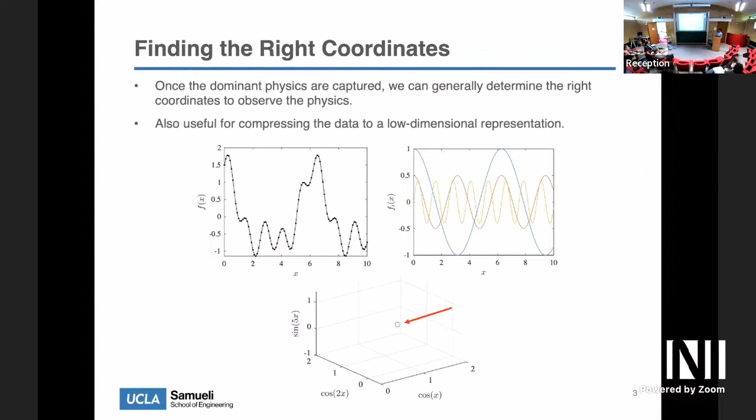Okay. Now, what have we been doing? We have favorite compression techniques. In the past, there's been a lot of efforts that looked into modal analysis techniques, including POD and DMD. Let's see if this works. Here we go. If you have a collection of fluid flows, we can go through the routine of POD type analysis, decompose it into mean and modes. If you have dominant modes, you can keep up to certain modes and truncate, and hopefully you'll get a reconstruction that looks fairly good for your need. If you need more, you can, of course, add more. So these are linear techniques, right?

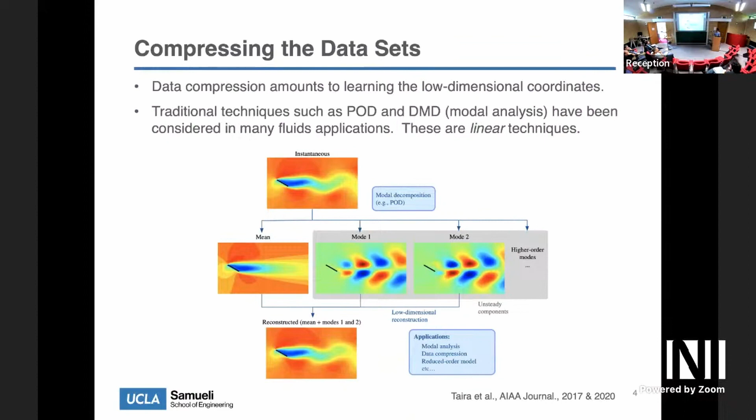Now, what I'm going to talk about today are nonlinear techniques. We've heard talks on autoencoders. This is no different. I'm also going to talk about how to use an autoencoder, but what's unique about this talk is perhaps how we view autoencoders in terms of compression.

Just a little interesting side note here is that there are also a lot of image and video compressions being developed in the film industry or the multimedia industry, billion-dollar industry, and they work really well. So for anybody interested in going beyond standard techniques to compress, especially videos, there are some really amazing techniques out there. And software companies such as CFD simulation companies are interested in using these as a way to save data, which is actually, I think, incredible.

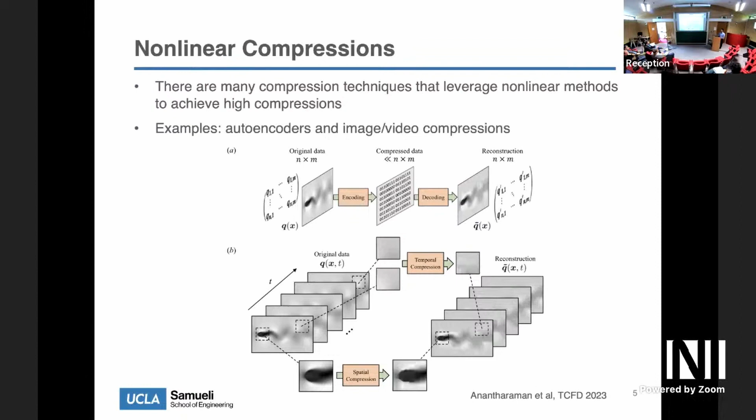Okay, all right. So let me now get into the physics side of why we think this is an interesting problem. And I think this is a really great problem to demonstrate the capabilities of data science techniques. I'll explain why. So you might see these in the news, right? And you might have been uncomfortable flying when there's a lot of what we call severe turbulence, right?

And they say it's about to get worse. I'm actually not going to talk about this. This is okay. You spill your coffee, maybe you're going to hit your head against a wall. That's fine. You're not going to die. The airplane's not going to break.

What I'm going to talk about is, here's a cartoon of it. I'm going to talk about airplanes that are much smaller in scale that might be flying in a more dense environment, such as in between buildings or in a mountainous area. Maybe you're trying to land these vehicles behind a ship. Now, if you think about these situations, you're going to be flying in the wake of either a natural structure or a human-made structure, which generates a wake.

So if you think about this, the size of the wake or the vortical structures in the wake could be about the size of the vehicle itself, the flying body. And this is where it becomes a little tricky, right? What we call the gust, the vortex gust, or these gusts could be on the same order as your flying velocity, right? The translational velocity.

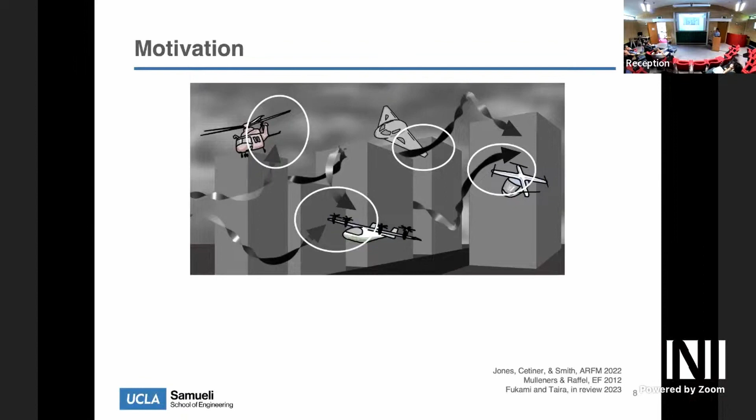Currently, if you go to a textbook, there's really not a lot of description on this. There are some gust response or gust rejection textbooks in the aeronautics sector. And if you look at those, the gusts are really small. Okay? The ones that we feel uncomfortable, it turns out to be not that big of a deal.

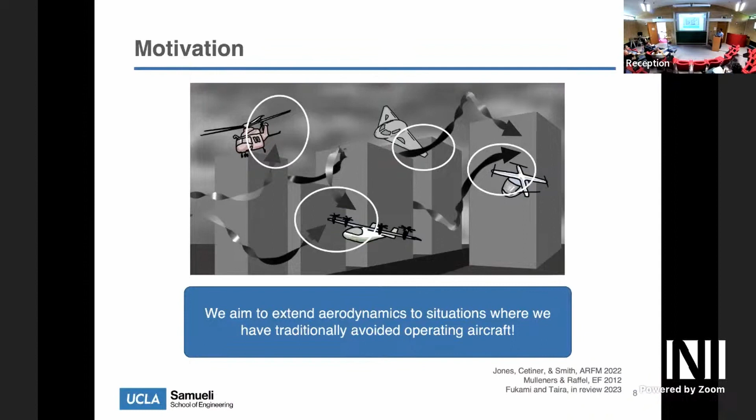So here, what we're going to try to do is to actually take advantage of data-driven methods to see if we can expand and extend our current understanding of aerodynamics to situations where we traditionally avoided operating aircraft. Right? So you might have heard in the news, helicopters won't go and rescue someone because it's too windy. Those are situations that we're thinking of and maybe even beyond.

So let me talk about this a bit and why it's complicated. This is what we're used to seeing. This is what I call steady aerodynamics. You have a base state, for example, something like cruise. And you might have some perturbations. You might be flying into turbulence. So you might see some fluctuations about the base flow. We actually know how to do this pretty well. So most of you have flown here or have flown in the past, and this is no different.

Now, if you're a bit more adventurous, you can fly into an unsteady environment. This is what I would call quasi-steady aerodynamics, where you have the base flow that's changing. For example, if you're hunting a hurricane, or if your vehicle geometry is changing over time, then you would have some base state that is changing over time, and you might have perturbations around it. This is also still manageable. We still have these aircraft flying and doing some pretty awesome things.

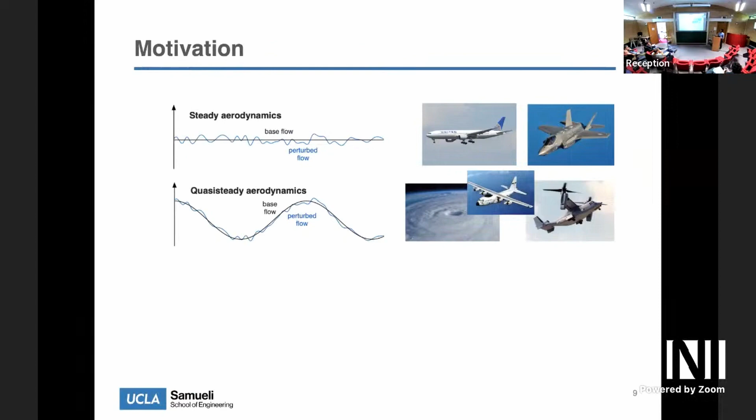Now, where it gets tricky is these situations, where you would have the base flow that's changing and the disturbance that is also changing on a similar time scale and also on similar spatial scales, which is encountered in these situations. For example, if you try to land a helicopter behind a structure or behind a ship, if the wake of the ship is pretty sizable, you can imagine that the helicopter is actually smaller than the wake itself, right?

So now, the way I think about it is, we used to think of a wing being hit by a perturbation, but the aircraft itself might be the perturbation if you think of the wake as being there, right? And the wake is being perturbed by the aircraft. So it could be the other way around in some extreme cases. So this is what we call extreme aerodynamics in our group and what we're working on.

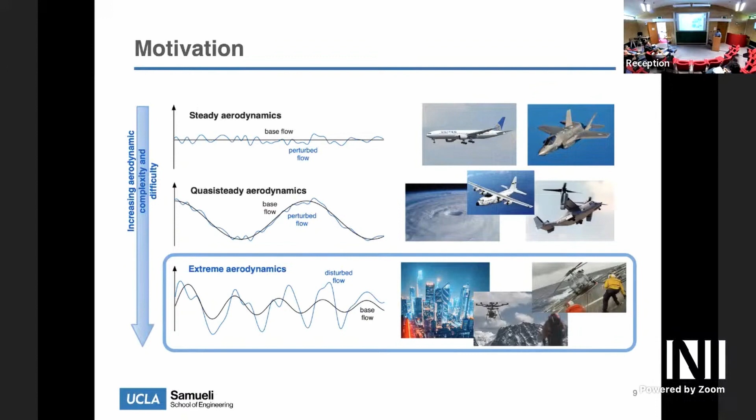And if I may borrow a figure from Anya Jones's annual review article, you can actually define a gust ratio, which is a characteristic velocity of the disturbance or the perturbation, which we'll talk about much more later, divided by the free stream velocity. And if you look at, for example, here is a commercial airliner, you're flying pretty high and the gust velocity is really slow. In that case, the gust ratio that they would encounter is extremely tiny.

Right? But if you go to a smaller scale vehicle or say a flying insect or an animal, it is possible that even for a small gust, because the translational speed is so low, the gust ratio that you're going to encounter could be on the order of 0.5 or 1. Now, as you go towards this direction, you would have higher gust ratio, and typically you won't see things flying at a gust ratio exceeding 1. In this talk, we're going to be talking about gust ratio exceeding well over 1 and closer to 10.

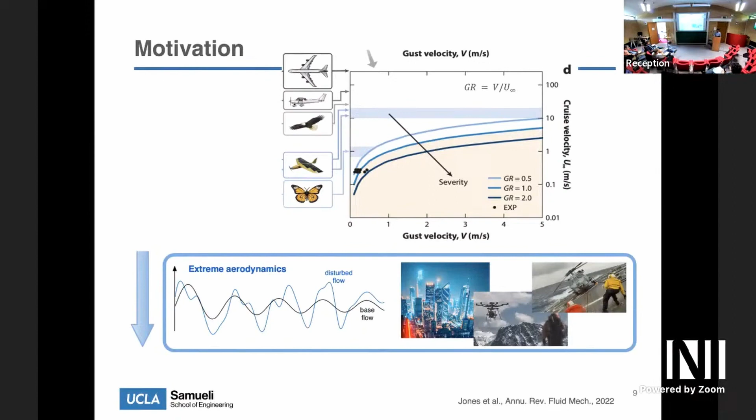Right, which will be if you were to fly in a very gusty condition over here, which does happen in urban canyons, urban environments, right, between buildings. Okay, so why is this challenging? Simply put, it's because you cannot distinguish the base flow and the disturbed flow easily. You can't decompose the two. So the amplitude of the disturbance is so large that linear theory is not expected to be valid.

In some cases, it turns out for a lower gust ratio, linear theory could still be taken advantage of, and it works to some extent. But as you'll see later, linear techniques are probably not going to work very well for the problems that we're going to be seeing. So we're going to have to come up with some unique ways to first model, characterize these flows, and hopefully control it.

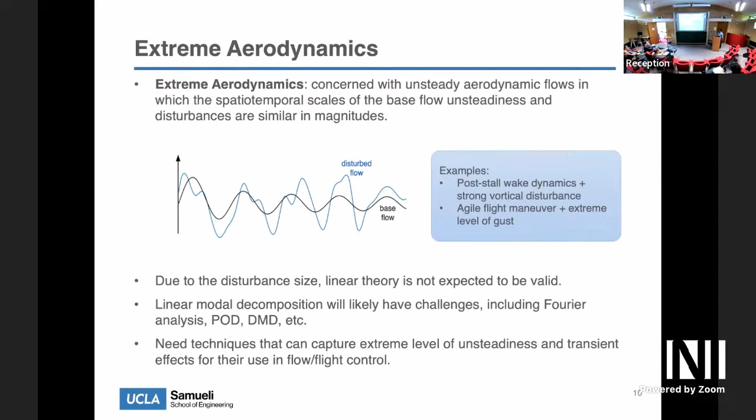And so this is year one of our effort, and you're going to see that we're making some headway toward modeling and analyzing this flow. You'll see later, and we're thinking now about how to control or maybe even stabilize flight. But that also needs to be revisited in terms of the concept of flight. Okay? So let me explain the model problem first.

The model problem we're considering is a two-dimensional airfoil flying at various angles of attack. It is laminar in 2D, at Reynolds number 100. But if you think about this problem, because this wing is going to be going through some disturbance, and the temporal acceleration that it will feel is so strong, the amount of vorticity that it's going to generate as it's flying through these disturbances is so large, it's going to have a lot of viscous effects. So we're actually okay with first studying laminar flow.

However, the bigger problem is actually the following. There's a huge parameter space that we have to go over to understand this physics. So this is just simply a vortex hitting a wing. However, the strength of the vortex, the size of the vortex, the position at which the vortex hits the wing, and the profile of the vortex. This is all on the vortex disturbance side, but also on the airfoil side, there's the angle of attack, airfoil shape, the timing at which the vortex hits the wing.

Those are also important. And we can actually go beyond and say, what about the Reynolds number effect, the Mach number effect, the effect of noise? The effect of noise we'll consider, but here we're going to fix the Reynolds number to 100 in an incompressible regime. If you think about this in 3D, this gets even worse, right? If you think about flying in a sea of vortices, the orientation could be at different angles, and you might be flying through it. It may not always be a two-dimensional problem.

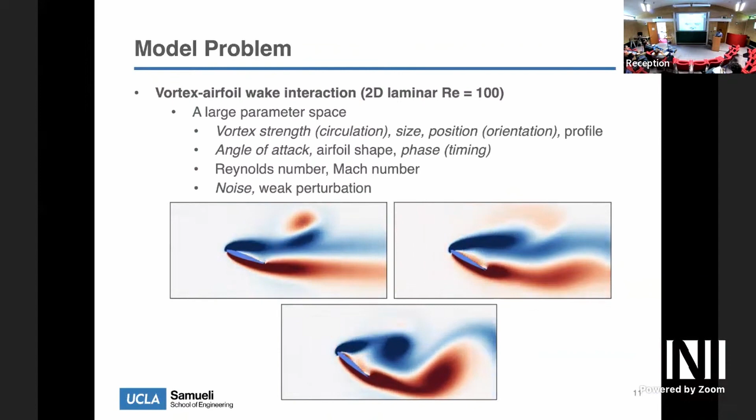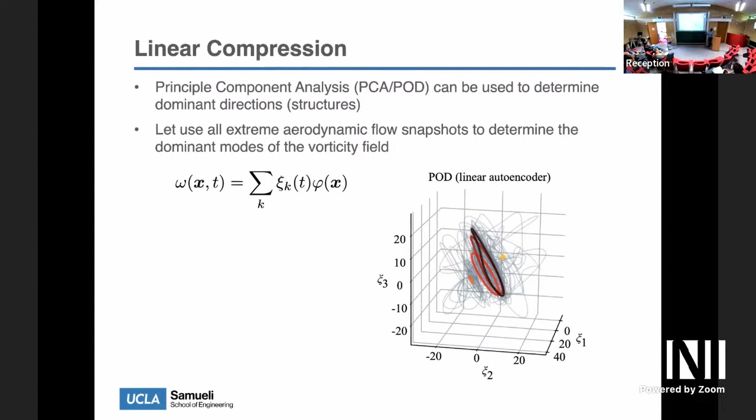Oh, yeah. Sorry. Go ahead. Are you removing the mean? How do you define it? Yeah. Mean across all the cases? Yeah. So that's not in that 3. No. So you just can't get this, right? Right. It's not supposed to, I guess. I mean, you could do some clever things and try to shift all this so that the wing doesn't look like it's in motion, but that defeats the purpose, right? And this is the amount of error. This is 130% error, 128% error. It just doesn't do well.

Okay. Do you satisfy the no-slip condition on the surface of the body? Because we're actually providing wings at different locations, right? We're not shifting it all to be at the same location. I don't think the no-slip is going to be satisfied. But then how do you guarantee the right production of vorticity? We're not guaranteeing anything. This is just straight-out POD. This is just post-processing. We're not trying anything super clever. We're just saying, take all the data and perform POD. Okay?

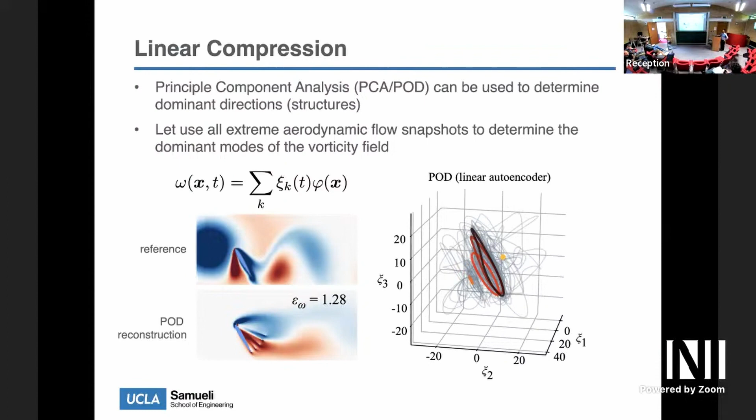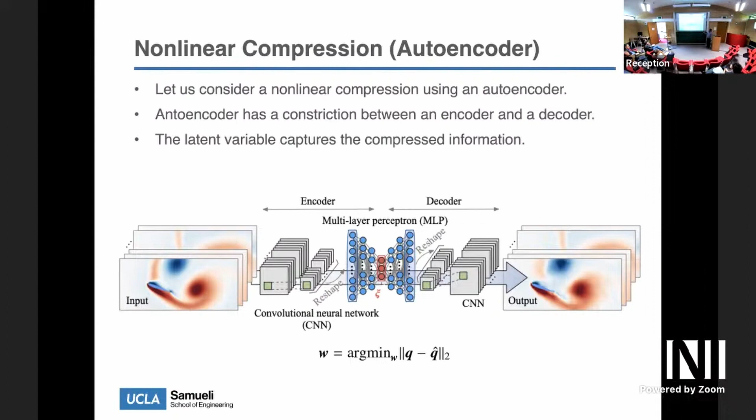And the nonlinearity comes in the activation function here, right? And here's what we get. If we just do a straight out autoencoder compression, we get this map. Now, is it better? I don't know. It looks like a big mess to me still. But what's nice is that you actually get to predict the flow. Right? Now, what's amazing here, and we were kind of pleasantly surprised, is that we only need 3 variables.

Are you predicting or are you reconstructing? Reconstructing. We're not doing prediction. That's a distinction. It is an important distinction. Just 3, right? So what that means is all the flow field features that we've collected can now be compressed to just 3 numbers, which is, to me, super important.

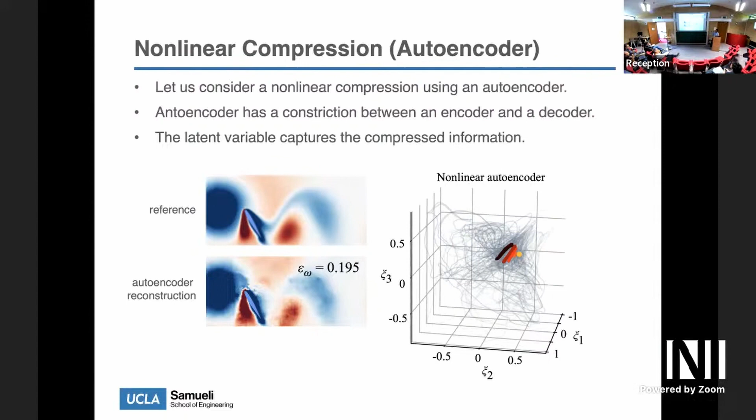Now, one thing I still don't like is this, because I don't understand what this means. This is all over the place. There's a big scatter of data. So this is when we started to think about how we incorporate physics, physical information, into the autoencoder compression. What's the accuracy in the force reconstruction? We can talk about it. It's actually about the same order. Force reconstruction is actually not bad. It's actually pretty accurate. But let me talk about this.

We want to do better, and we want to understand certain types of physics that would appear in this type of extreme flows. And this is how we supplemented the training process. We said, what we really care about in this whole exercise is, again, hopefully how to fly, and lift is an important variable. So as we go through the training process, we wanted to make sure this latent space variable, the coordinates xi, retains information so that it can reconstruct the lift very well. So in the training process, there's also the minimization for lift. But this actually works really well, because this also implicitly weighs structures that are important in generating this transient lift.

Furthermore, if you recall how large lift is, lift went up by about 10-fold, by an order of magnitude. So if you want the transient physics to be captured, this turns out to be a pretty nice way to incorporate that transient physics so that these weights are tuned to capture transient dynamics well. So only 3. We tried a lot. So there's some tuning in this. I'll talk about why 3 seems to be a good number. We actually tried with like 6, 5, and it was more like a reduction process to see how far we can reduce it. And 3 seems to be the minimum that we can go down to. So there's a bit of a trial and error process. I'm not going to lie to you, getting to this structure was not a walk in the park.

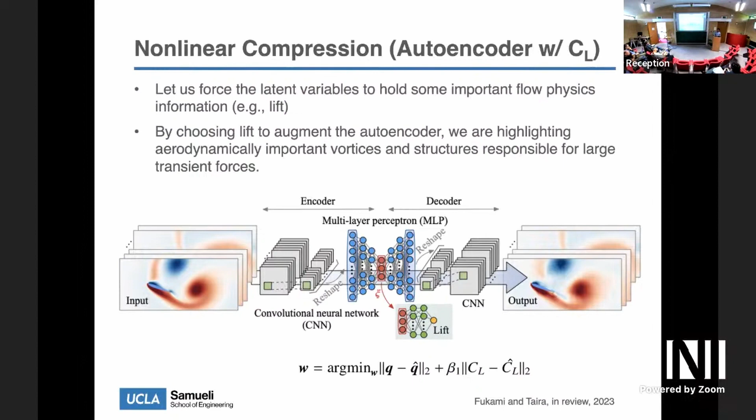Okay, now if we try this, it gets interesting. We get this. So all that mess that we had, and now we get this structure. And Petros actually has seen an earlier version of this, and Petros, I'll make this note just for you. Earlier when we tried this, we actually just tried to put in a shape that it conforms to. Now we don't do any of that. So this just comes straight out of the optimization, or sort of the training process, right? And of course, these solid colored lines are the cases without any disturbances.

So now, Rich, you asked me, why 3? Actually, it could be 2, but I'm going to keep it as 3. Because this axis, Xi3, tells you the angle of attack, or the effective angle of attack that the wing feels as it's being hit by the vortex. Xi1 and Xi2 are actually needed to define the phase dynamics as it's oscillating. Where oscillating is kind of a stretch when you have transient physics, but I'll get to that later. So you need actually 2.

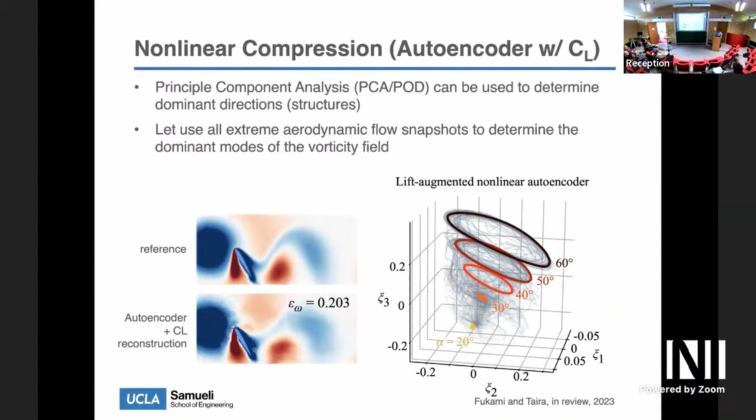Now, if you look at the flow field, the error actually goes a little higher, but not much, and you can get the flow field pretty well too. And Petros, to answer your question, the lift prediction is pretty good too. And this is for Peter. This shape, we call it cone shape. But in the Japanese language, we call this the triple cornet, which probably is related to the cornet. So it resembles that shape, so we call it that.

What happens if you put a fourth axis in your latent? You can do well with the reconstruction, but it's very difficult to understand what the fourth axis means. Have you done that? Yeah, we've done it. And what does it do? You can plot 3 axes and it gives you a similar shape, and I believe you can improve the reconstruction slightly, but it doesn't seem to be that much use for the fourth one, to be honest. So it's captured after 3. Yeah. If you increase the Reynolds number, I'm sure we'll need more than 3. We haven't gone there yet.

When you're trying to reproduce the flow, is it just an initial snapshot of the vortex hitting the aerofoil, or is it the whole evolution? It's a whole evolution. This is pretty amazing. 3 variables, whole evolution. I'm not just talking about one flow field only. This is the entire collection of a vortex hitting a wing. Sometimes the error will go up and down, as expected. But overall, we can do a pretty good job of estimating where the vortices are and what the wake will be. So you take the time of the vortex appearing from the left, going out the right.

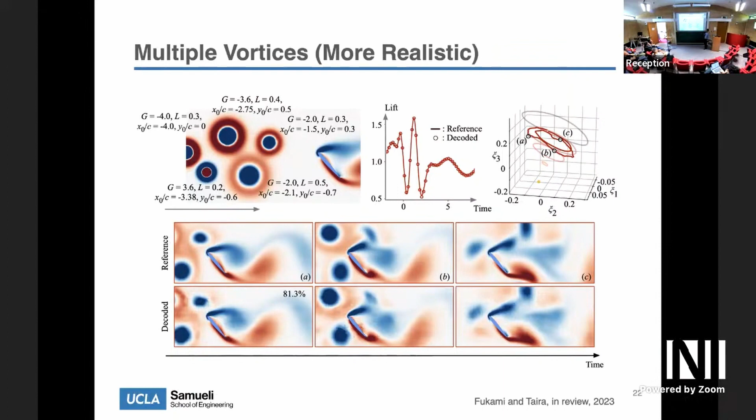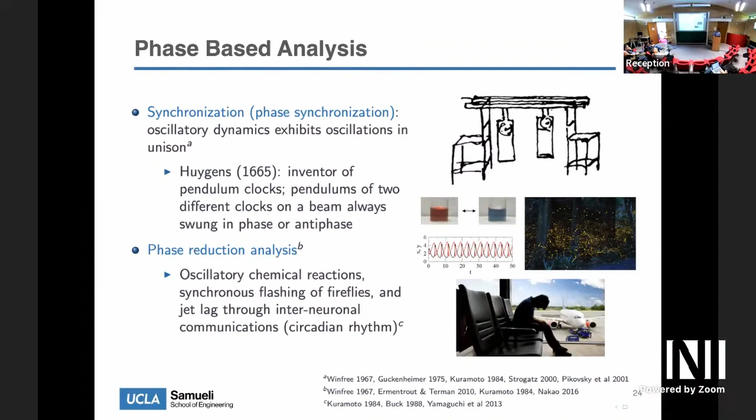Okay. Now, Karthik asked about why these circles, right? So this is a transient problem, but let me take a step back and talk about phase dynamics for a little bit. I've been interested in the concept of synchronization and also this concept called phase reduction analysis. And trust me, it's going to come together later. But there's a lot of analysis being done in the physics and biological physics community as to how you can analyze synchronization. For example, chemical reactions or jet lag. If you're thrown off in time, which is also phase, you can actually go back to the original circadian rhythm. You can analyze how you can go back, right?

Now, this is actually pretty nice. You can take a periodic flow, for example, or a periodic dynamics, and define phase. So if you have the full state dynamics defined as Q dot is equal to F of Q, we can also define the phase of that system. And the time derivative of phase is omega, which is the natural frequency, right, of that periodic system.

And if you were to look at what theta dot would be, the phase, you can actually define what's called a phase function, which is not just on the limit cycle, in the vicinity of the limit cycle, and is defined as a function of the state variable. And if you go through calculus, you can see that this is a gradient of the phase dotted with Q dot. And Q dot we have from the governing equation of the Navier-Stokes equation, which is the right-hand side of the governing equation. And if you take an inner product of your phase function and F, the right-hand side, that's your natural shedding frequency, let's say in fluid flows.

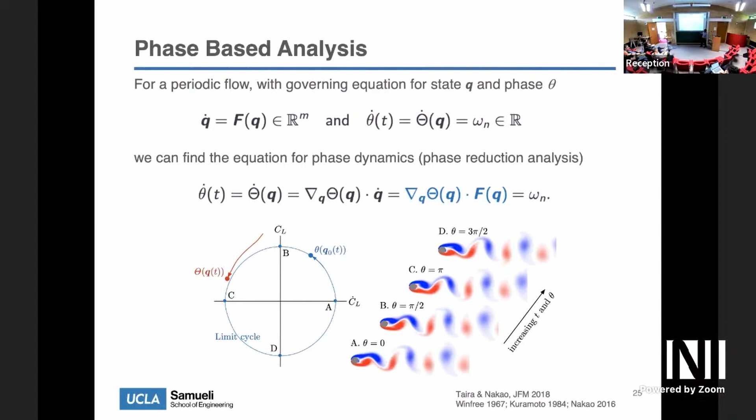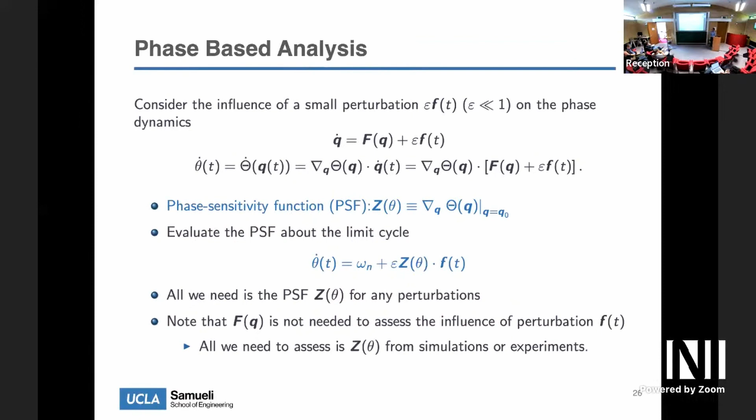So for example, in flow over a cylinder, there's a dominant frequency. If you know where you are on this limit cycle in terms of the phase, you can always get back your state, right? Now what's nice about this analysis is that you can actually look at the influence of a perturbation that's added to the system. The gradient of phase function is actually called the phase sensitivity function. And if you take an inner product of this phase sensitivity function with a perturbation that you put in relationship to the phase, this actually tells you whether that forcing function is going to give you phase advancement or phase delay. Right?

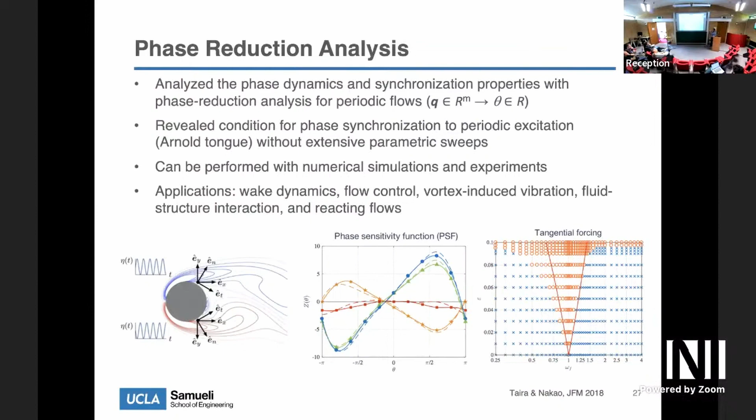And if you go through this exercise, you can figure out how sensitive your flow field is to certain types of perturbation. And you can even go further to figure out whether you're going to get synchronization for a range of frequency and amplitudes, right? So some of you might have heard of Arnold tongue. You can actually get to Arnold tongue, okay? And this tells you whether you're going to synchronize to a sinusoidal input or periodic input or not, okay? Now, why do I care about this? Is because I need to lock on sometimes to a certain signal as vortices are shedding over my wing.

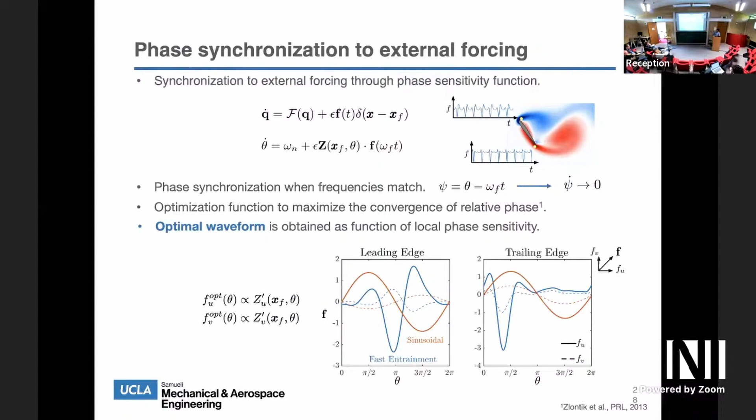Right? So here, it turns out there's actually a very nice way to figure out your optimal waveform from phase sensitivity analysis and figure out where should you actuate and how you should actuate over time. And we're going to actually compare this to just a simple sinusoidal input versus an optimal waveform input. Here for an example of flow over an airfoil, the leading edge and the trailing edge. And here's the difference. I'll just get to the point. If you were to put in a sinusoidal forcing input, it usually takes about order 10 cycles, let's say 6 cycles or so, to synchronize your forcing input. However, if you use the optimal waveform, you can synchronize in about 1 to 2 cycles.

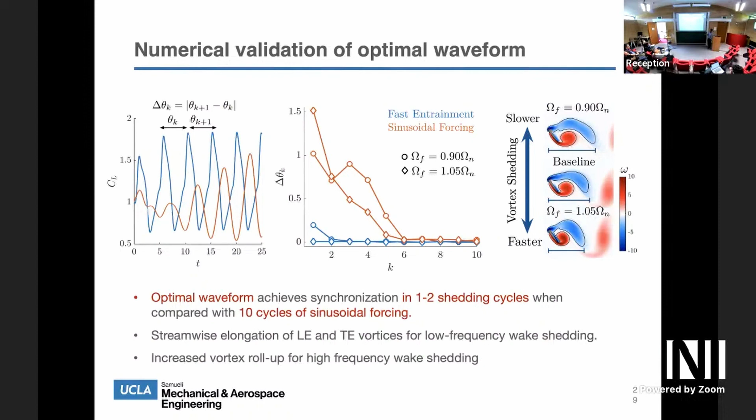So this is ideal because if we know there are certain types of shedding event, and if we know what the optimal waveform is, we might have a chance of actuating and have the effect be felt really quick, right? And what that translates to actually on the vortical flow field side is whether we can accelerate shedding or decelerate shedding. Now, we're still looking at this actually and trying to figure out how much force we need to get changes in lift, and it turns out it's actually not a small amount of force we even need to change the lift on the body. And that's expected because this is a pretty violent event, and we're having to work at making these vortices leave or stay on the wing longer, right? But you can change the lift behavior pretty drastically. Okay, so what does that mean?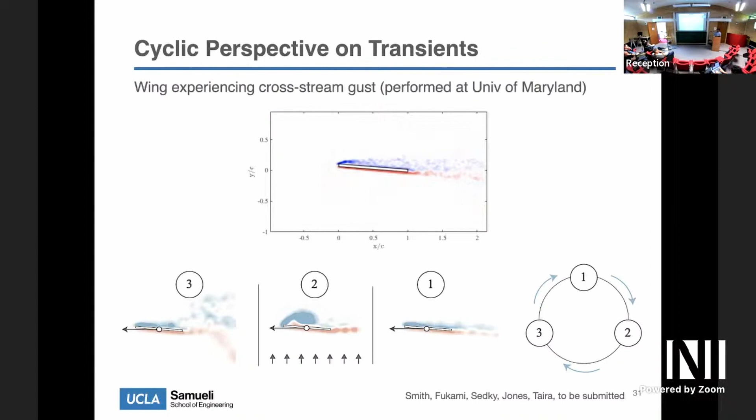Okay? And for now, there is actually a family or a community of research in the area of persistent homology. And this is pretty interesting. You can actually look at an n-dimensional system to see if you can form a loop. And I won't go into the details, but what it does is it kind of makes this hypersphere and sees, as you expand the hypersphere, can you actually detect a loop in your system or your state map over time? And it turns out you can. In our system, there is a loop because you go from 1 to 2 to 3, where 1 and 3 are pretty similar. So it actually closes a loop, although this is a transient.

You can take that information and say, well, can you go through a learning process to figure out what the autoencoder is, but with the idea that you're going to be generating this loop that you have gotten from homology, right? And it turns out you can.

So now in this latent space, it's a different latent space where we go from 1 to 2 to 3 to 4. Here is the PIV measurements. We go from the wing initially without any disturbance to a leading vortex developing, forming, and then detaching. And here's a reconstruction you can get from this type of autoencoder.

And actually, of course, it's not surprising that the mean square error of the reconstruction is really low compared to what you would get from something like POD. POD just can't get this, right? It wouldn't make sense to even try.

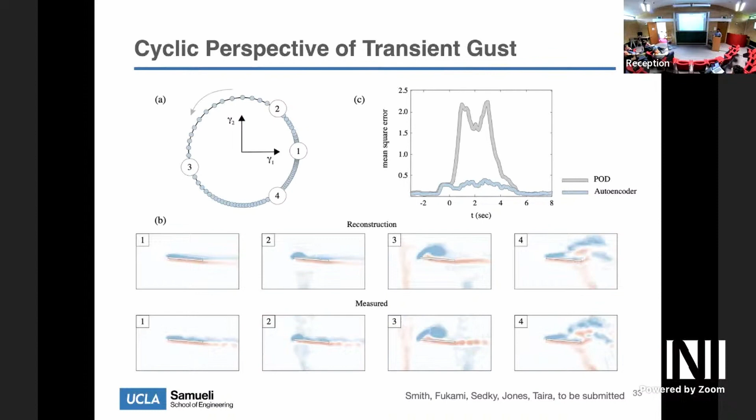Now, what's really cool is that you can apply it to a family of these experimental data sets where you have different incident angles and also different gust ratios. So here, this is kind of an interesting case. This is at a flat plate angle of attack.

If you were to try to increase the gust ratio, stronger jet hitting from the bottom, what you'll see is you'll still get the loop, but you actually go further out, right? The starting point is the same, but you'll go further out. If you change the angle of attack, then you can actually map out these loops at different locations.

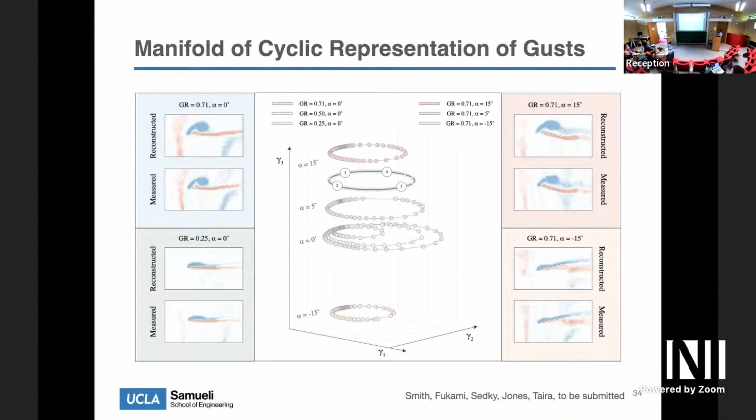Now, with this perspective, we're now able to say that we have the concept of phase, right? And because we now have the idea of how to introduce optimal waveform for control, we might have a chance of figuring out how to control the flow or the attitude of the wing so that we might be able to achieve desirable lift profile over time. So for that, maybe I'll talk about the outlook side.

We only talked about one type of perturbation, right? Or two types, actually. One is the vortex hitting the wing, and the other one is the jet hitting the wing. We're actually looking at different types of perturbations in terms of the wing motion as well. But there are a lot of different types of disturbances in the atmosphere that we'll have to consider. So we're looking into now three-dimensional perturbations, three-dimensional wings, different types of flows.

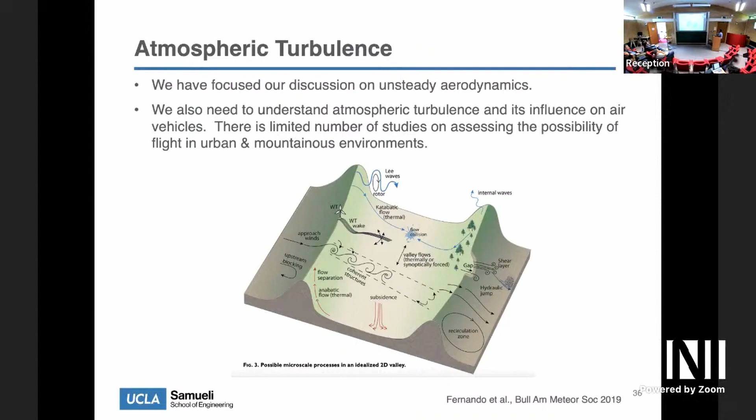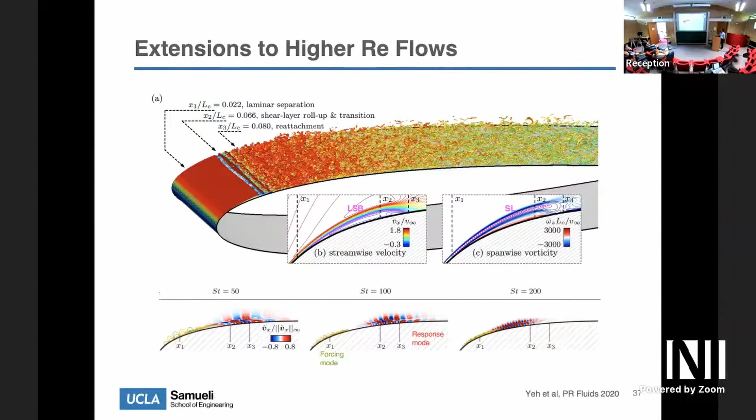Right? That's something we're going to have to do, but luckily we have about 4.5 years to do this. And we're going to be extending our analysis to higher Reynolds number flows. Thankfully, we have been fortunate to study these types of high Reynolds number flows at 500,000 in Reynolds number. We know how to handle these, so this shouldn't be too bad.

So in concluding remarks, I'm going to say a few things, but we started analysis and modeling and control of extreme aerodynamic flows. A lot of the techniques that we developed for turbulent flows, I think we're going to be able to use to control or think about how to control these events. Let's see. Let's jump to the last one.

However, I don't think we can actually think about control or stabilization of flight in the traditional way where we track this nice cruise trajectory. I think we're going to have to change the way we think about it because the lift fluctuation is so large. I think the goal is more like we don't crash. And we don't know if the traditional flow affectors are useful: trailing edge flaps, leading edge flaps, ailerons, they may not be efficient. So we might have to think about how to design the aircraft completely differently as well.

Now, I think there is some hope. We're talking to some controls engineers about how to use the information about the manifold that we found, this cone-shaped manifold, so that we can go from point A to point B on the manifold in maybe an energy efficient manner or in a quick way. There seems to be some nice theory on the control side that maybe we can leverage.

And one of the other things that I haven't talked about today, but what Kai has found is that we don't actually need a whole full flow field to reproduce what's on the right-hand side. It turns out you can replace it with pressure sensors on the wing, only a few. I think he tried it with 8 or so, on the wing to reproduce the whole flow field on the right-hand side pretty accurately, while getting the manifold.

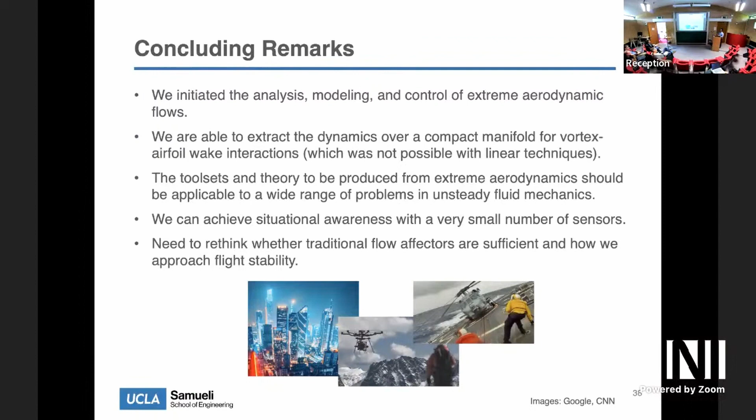But still, if you use these three, because you plotted against these orthogonal bases anyway, physically the axes are orthogonal in the plot. Just the way we plotted it, right? But what are we looking at there? Because if I look at this, I would assume it's sort of a Cartesian frame of reference, which is sort of global, but they are called latent coordinates, γ1, γ2.

So if you think of this from an oscillator point of view, you do need two axes to get something like a sine or cosine type behavior, right? So to me, it makes sense that if you want oscillatory or circular behavior, you need two axes. Now, you also want to distinguish these different cases, because if you don't have the third axis and it collapses all on top of each other, there's a danger that you might overlap these circles.

And if the two circular paths overlap, that means you can't distinguish the different angles of attack, right? So it's natural to me, at least in a post-processing way, that this axis is needed to distinguish the different incidence angles. By the way, I said this is a cone shape, but it's actually an hourglass, because if you go to the negative angle, there should be a similar, mirror image structure.